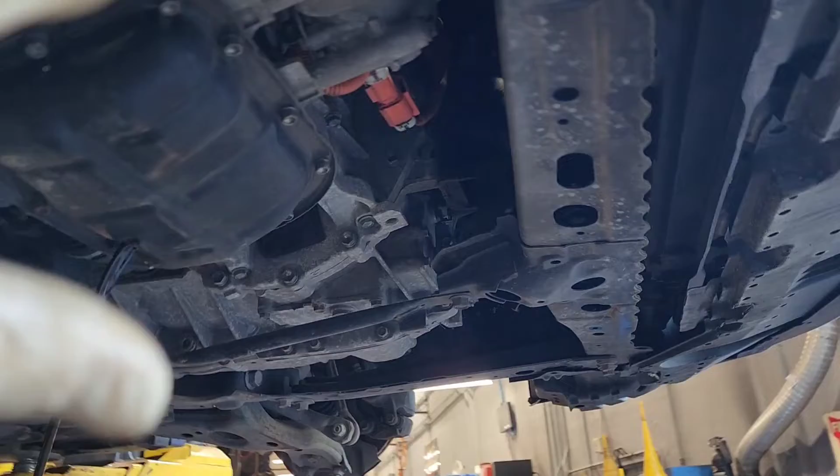Now, if you have a lift and you're doing this in a shop, the fastest way to do this is take off this undercover, take off this side cover right here. Go ahead and drain your oil because the oil sits higher than the timing cover. While you have it here, you want to go ahead and take off your oil filter right there. Pull your oil filter cap out. Then go ahead and pop off the bolts right there. You have 4 12s, and that's the housing, and just let it drain.

You're going to have your connectors back here: a crank sensor, an oil pressure switch, and an O2 sensor. Disconnect those, unclip it from the metal harness because you're going to pull the harness all the way up and over. Then drain your coolant right here.

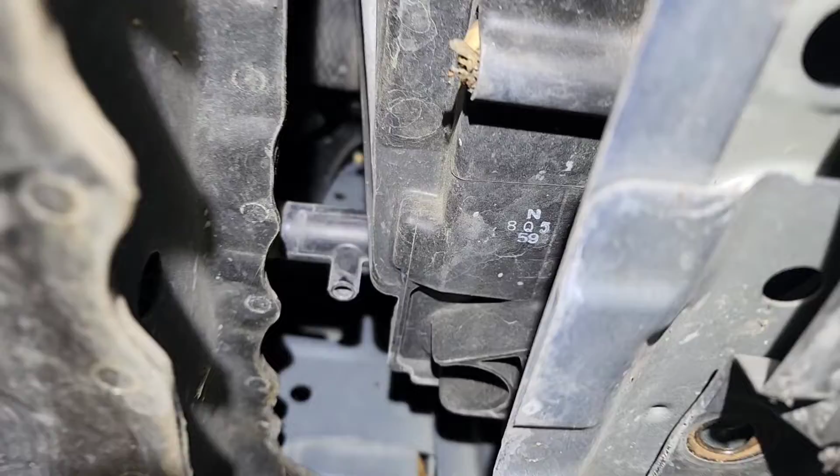So take out 3 bolts and then loosen 1, and then just tap it with a hammer. It doesn't take much and it'll pop loose. Then we can go ahead and pull this housing off like that. Super easy.

Then you have those 2 O-rings there. You want to make sure you get those so you don't lose them, to match them up. Depending on the miles on the vehicle, they're going to be pretty stuck in there. These ones came out not super bad. These O-rings are the same size as 1 or 2 of them inside the timing cover. I believe it's the one that's...

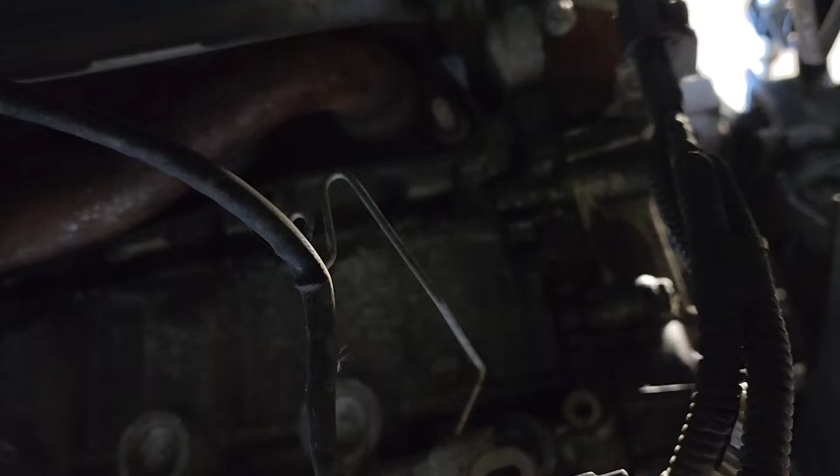It's really bad. You can see it leaks all down the back of the timing cover. That's why we're replacing the timing cover, that's why we're resealing the timing cover.

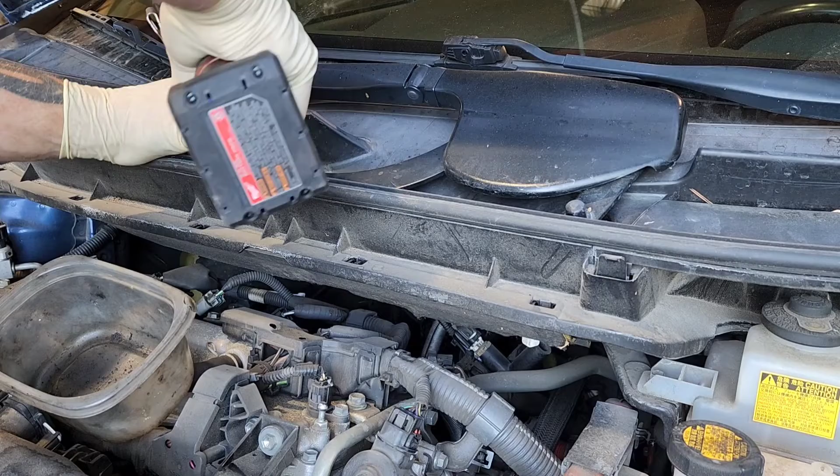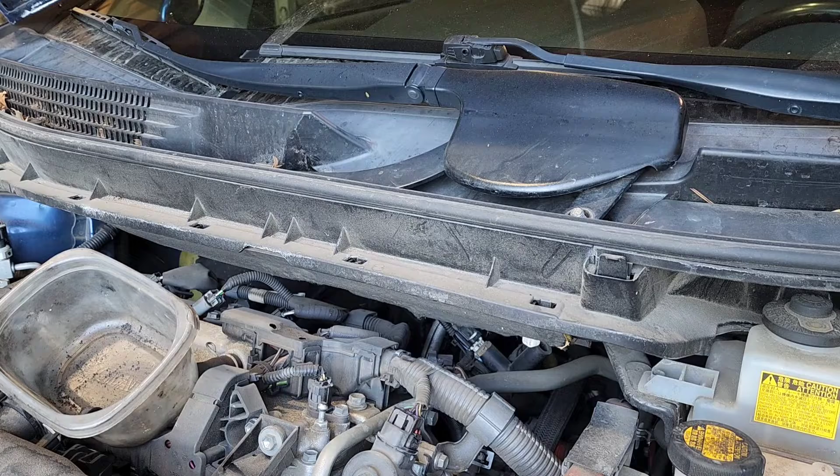So I did this way out of order. To do this the fastest, the first thing you want to do is take off your wipers, take off your cowl, get all this out of the way. Take your valve cover off to get your engine rolled over to top dead center. Then while you have it in the air, you can take the balancer off, the water pump bolts out, and all the timing cover bolts out from underneath while it's in the air, and it's easier.

So this one here, you can push it down like that. The plastic part that goes over the cowl is super easy. You just have a bunch of little clips along the front and it'll come right out.

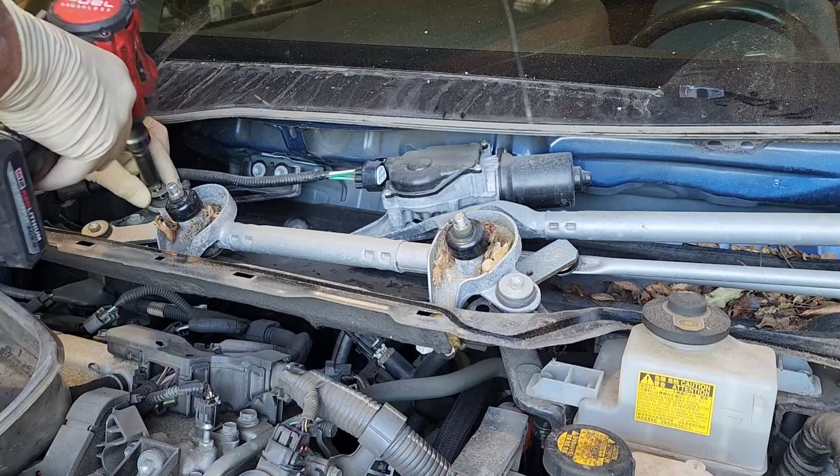You're going to disconnect the connector and unclip the harness. Then you're going to have 4 10s for the wiper motor assembly. You get those out, and then the wiper motor comes right out. Then there's going to be a bunch of 10s along the metal cowl panel. You unbolt all those and pop it loose. Get a vacuum to vacuum up all the debris, and it'll pop up and come right out.

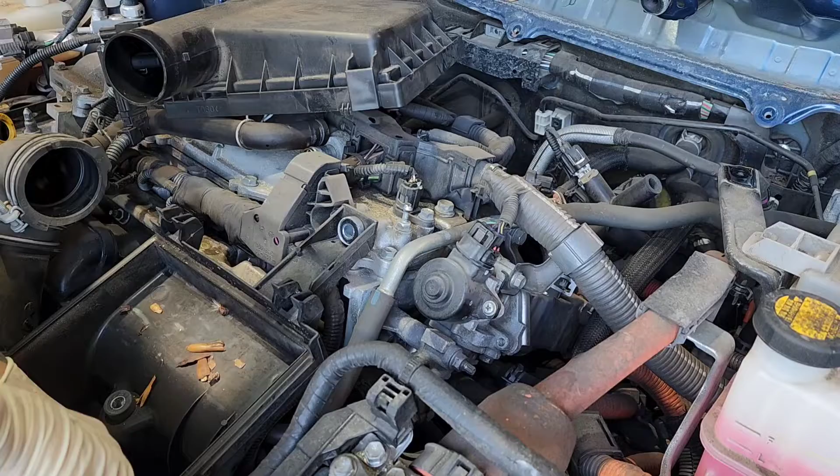So your airbox has bolts inside, they're all 10s. And then for your intake air tube on the throttle body is a clamp. Everything else is a 10 mil.

So these are the new Lisle electrical disconnect pliers. These work great for fuel injector connectors. You just do like that. Look at how easy it releases them. Super simple and not very expensive at all.

So I unbolt everything on the harness so I can pull it over like this, and I use a bungee to get it all the way out of the way.

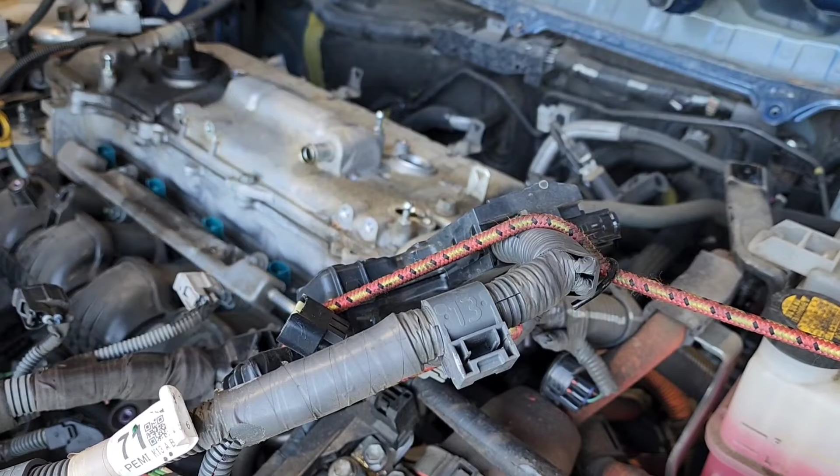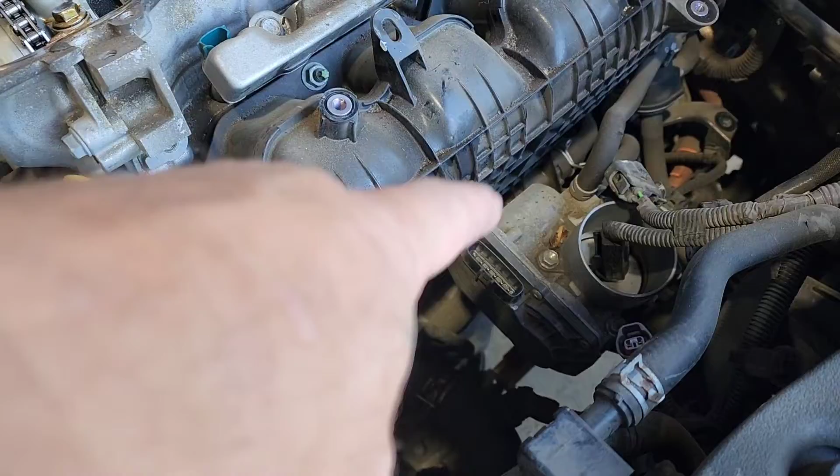The next thing we need to do is put a jack stand and a piece of wood under the oil pan, or if you don't have a lift, then you'll need to use a jack to support the engine, because we have to take the engine mount out.

The engine mount has a bolt and a nut right there, and then a nut underneath. That nut's a 14, the top 2 are 17s, and you'll have 3 17 millimeter bolts around the perimeter. If you go ahead and take your coolant bottle bolts out, you can get the engine mount out. Then we need to take this bracket off for the engine mount, but this stud right here is in the way for that bolt. So if you take that stud out, then you can take that bolt out easily.

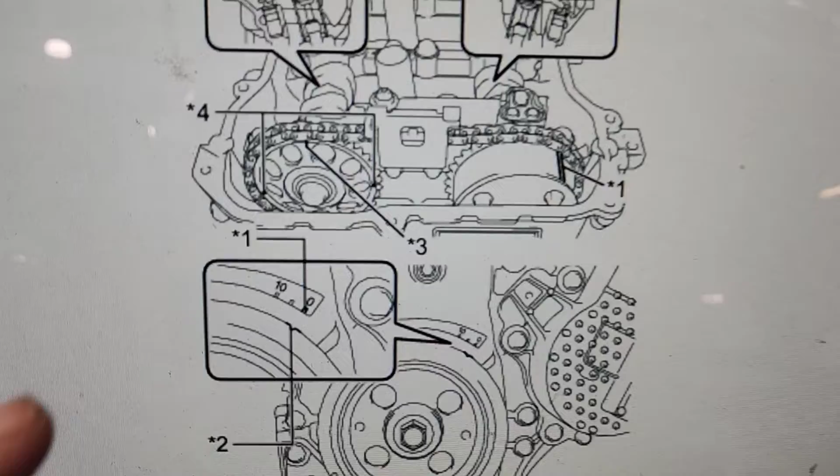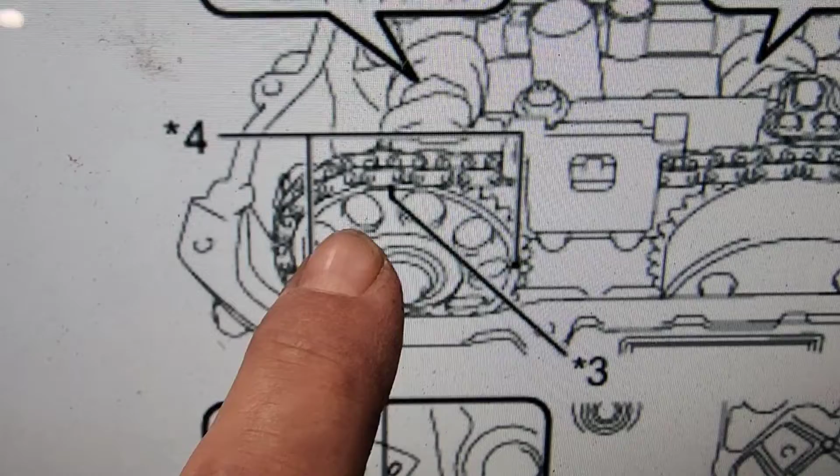Once you get the valve cover off, now this is really important. We're gonna roll over the crank until the notch right there lines up with the 0. But what we're looking for is there's a dot on the back cam and a slot on the front cam. This slot right here is gonna be around the 1 o'clock position, and this is gonna be around the 12 o'clock position.

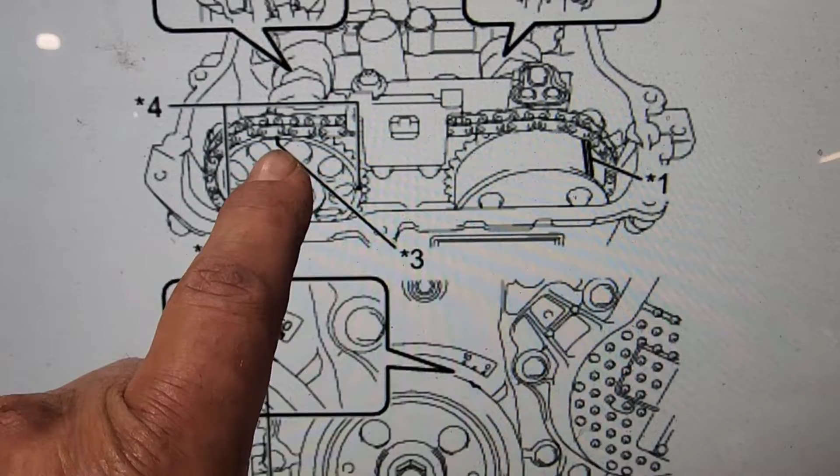So if we roll this over to 0 and we don't see those 2 marks, that means that the crank is 360 degrees off, because this crank rotates 2 times per 1 time of the camshaft. So if we're lined up here and this is not there, that means that this dot is down there and this slot right here is down there. So we're gonna roll this thing over the first time and see where we come up, because we need this thing to be in time.

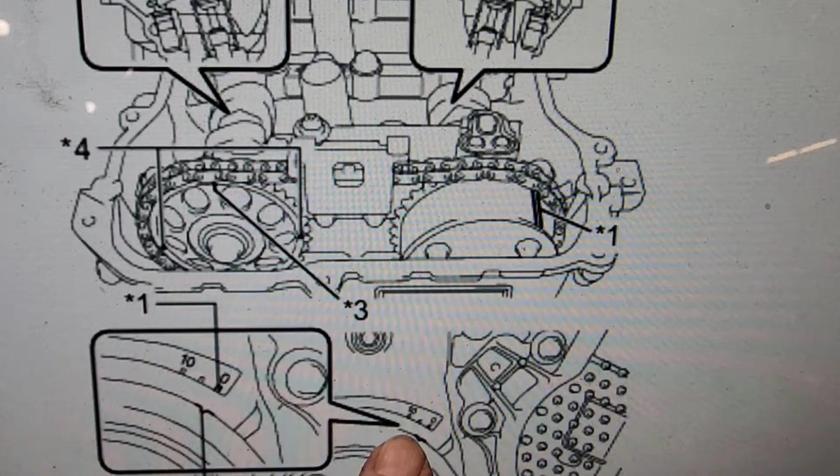As you can see right here, we have the crank lined up, and let's take a look up top - we don't have a notch right there, and we don't have a dot on the rear cam. That means that the cams are 180 off.

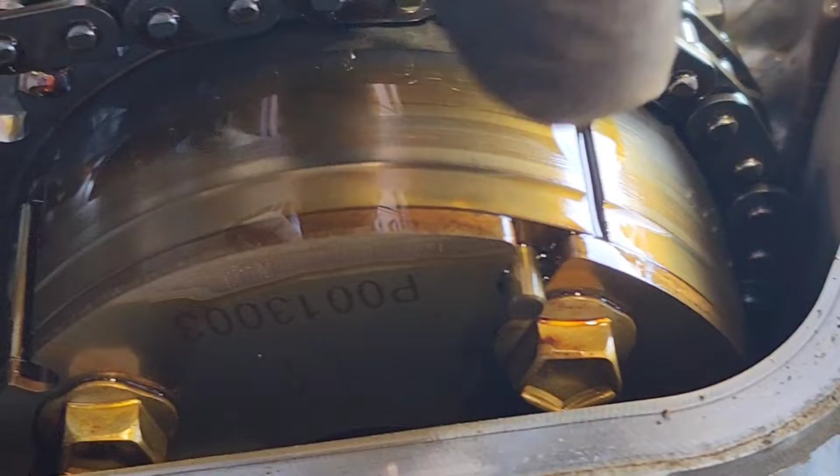So now we need to turn the crank 360. So now I turned it one more time - I was on the wrong mark before, but it was still off. So now we've rotated the crank 360 degrees, and now we have our notch on the front cam right there, and we have our dot on the rear cam, meaning the engine is timed.

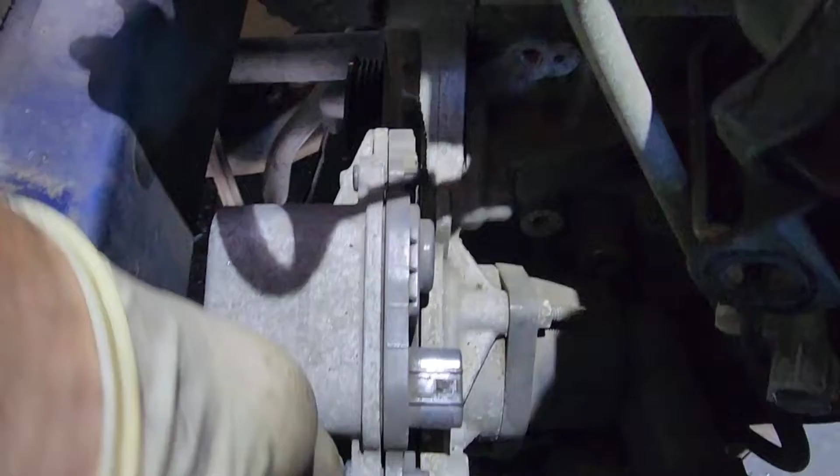Your water pump is electronic, so you have your connector disconnected. Take your 5 bolts out and pop your water pump off.

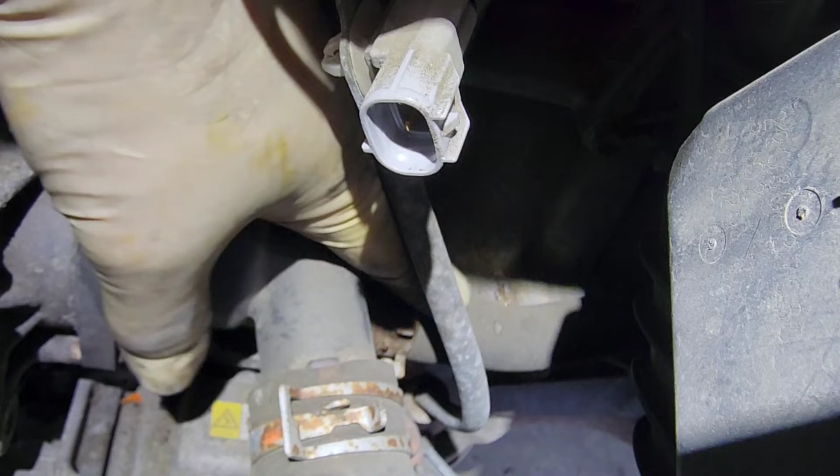Your thermostat housing is going to have to unbolt because it bolts to the back of the timing cover. Now the problem with the thermostat housing is you have this bypass coolant hose back here, and the engine oil dipstick tube is in the way. Well, I'm not replacing this thermostat housing, I just need to remove it from the timing cover. So what I'm going to do is disconnect the engine oil dipstick, and then I will be able to unbolt the thermostat housing and pull it back.

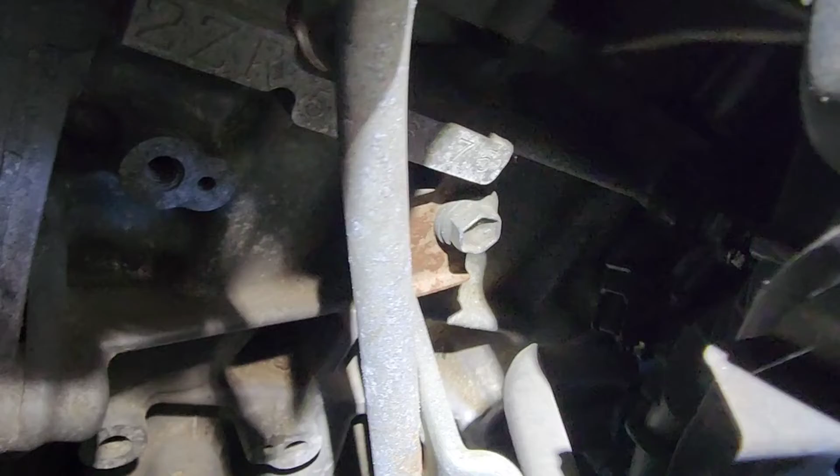The dipstick, there's a clip there, and there's a bolt right there that bolts the dipstick up. There's also a connector right here that connects in, so you have to unclip that connector.

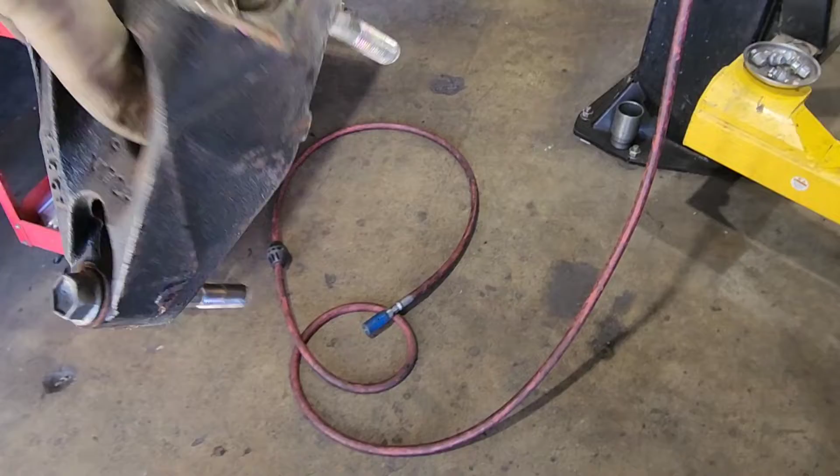That stud is just an 8 mil. Zap that out, then you can get to that bolt, and you got the three 14s, and you get that engine bracket out. That's what it looks like right there. It's got silicone on the threads because it goes through the timing cover.

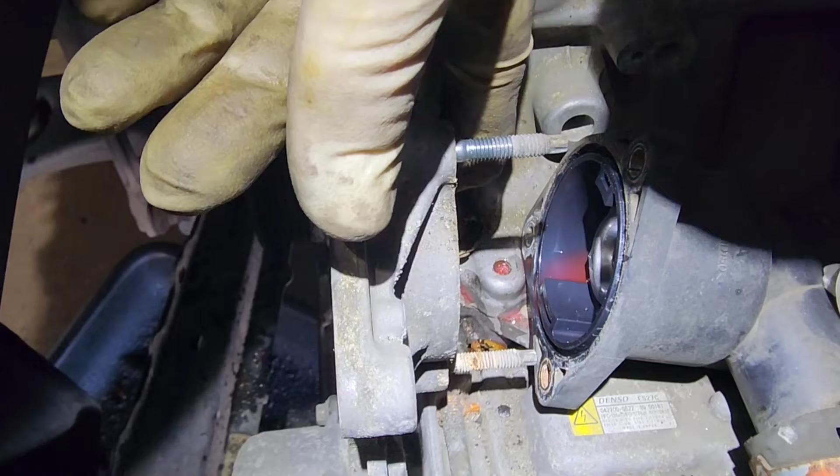So the top fastener and the front fastener are a 10 millimeter nut, and on the back side is a 10 mil bolt. So with the dipstick out, you can get an extension and a wobble socket, and you can get down in there from behind, right along the block.

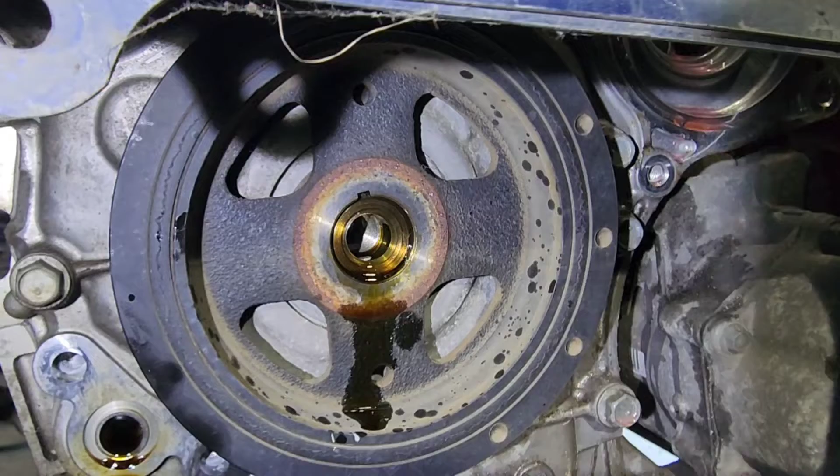Before you take the tensioner out, you want to get this balancer off. It's a 19 mil, and if you put a pry bar on the top corner and pull on the bottom corner, it will come out.

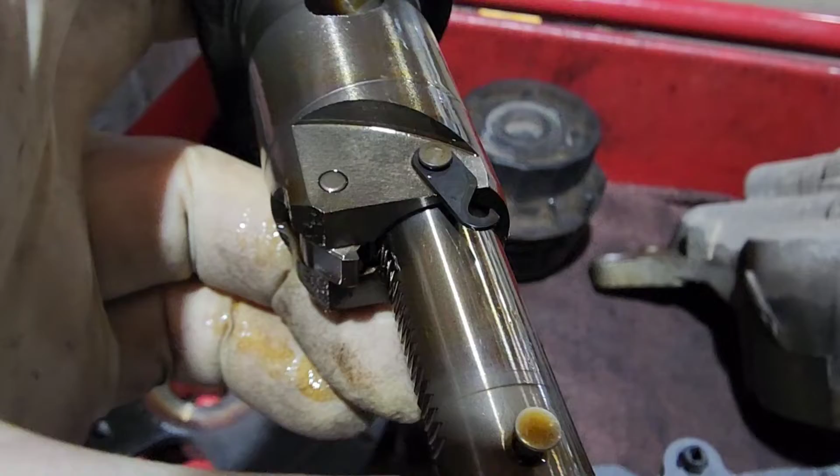So here's what your tensioner looks like. It's got a metal gasket and a little lever right there. That lever faces up because it's to lock the tensioner in place for install. So we're going to reset this tensioner, and we're going to use that little clip there to hold it in the reset position. I'll show you that later.

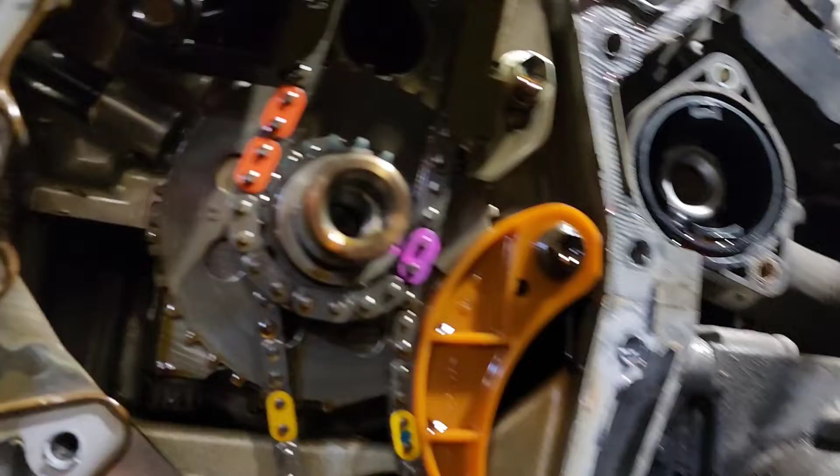So I mark the chain to the sprockets. Right there, I mark it to the dot, and that front one, I mark both the links on both sides of the notch. Because this slipper that's on the rear, where the tensioner normally resides, it can slip off the inside of the block and fall down. So if that slipper falls backwards, then your non-tension side of your chain can slip off the crank, and it can possibly move on the front, which would make your engine out of time. So I mark that link right there next to the dot on the crank, and I know that's where the engine was when I started. Before I put it back together, I make sure all 3 sprockets align.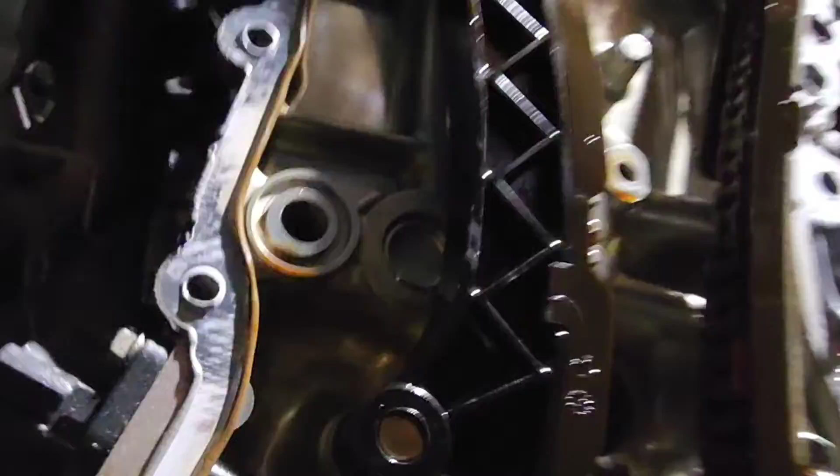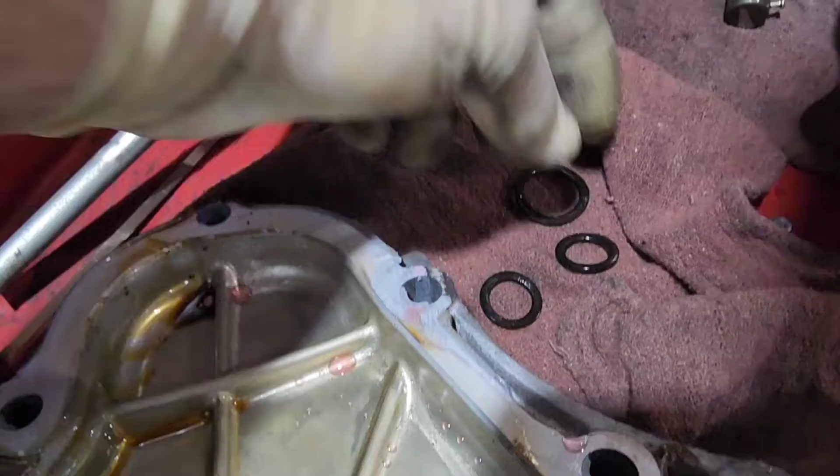Now there's an O-ring right there. That O-ring is the same as the 2 on the front of the timing cover for the oil filter housing. And then you have two smaller O-rings up here, right there. Those are all in your timing kit as long as you get a MAHLE kit. So that's the bigger one, that's the bottom one, and these are the top two, they're smaller. This big one goes there, the two small ones go there.

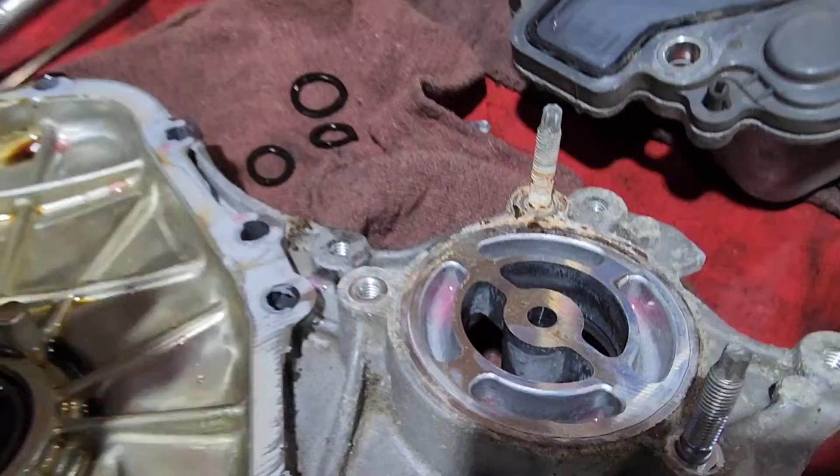So we're going to go ahead and knock the crank seal out, clean up the thermostat seal where the thermostat's going to ride. And we're going to flip it over. You're going to clean up where those two O-rings go. You're going to clean up the front of the water pump surface where the water pump seals.

Anytime I remove a timing chain tensioner, I replace it. Usually I will sell it with the job. On this one, I didn't estimate it out because this one came in for something completely different and I really didn't think they were going to fix it. Most people don't fix the timing cover on Priuses.

Next up, we need to clean the block. We need to get all this silicone off of the block surface, the head surface, everywhere that the timing chain rides. We need to get that all cleaned up. And right there, you have one bolt hole right there. You're going to get that silicone off there as well. Now that's where that 10 mil rides. That 10 mil has a washer that's just like the one in the middle of the valve cover. It comes in your MAHLE set, as long as you get a MAHLE set, and it is right there.

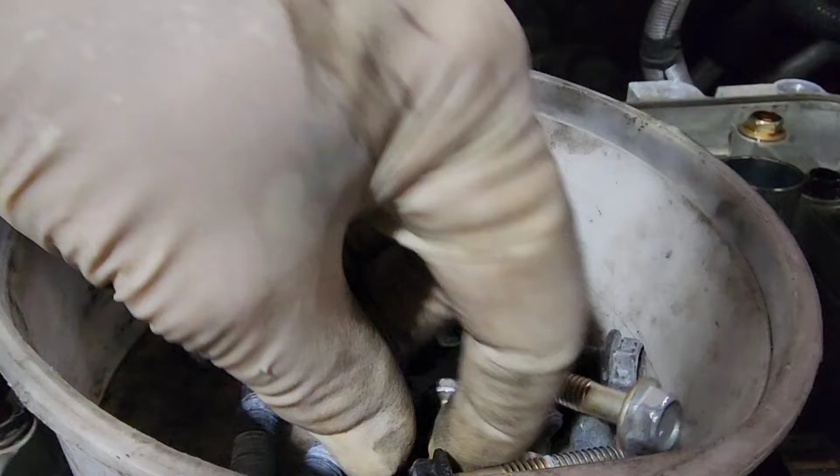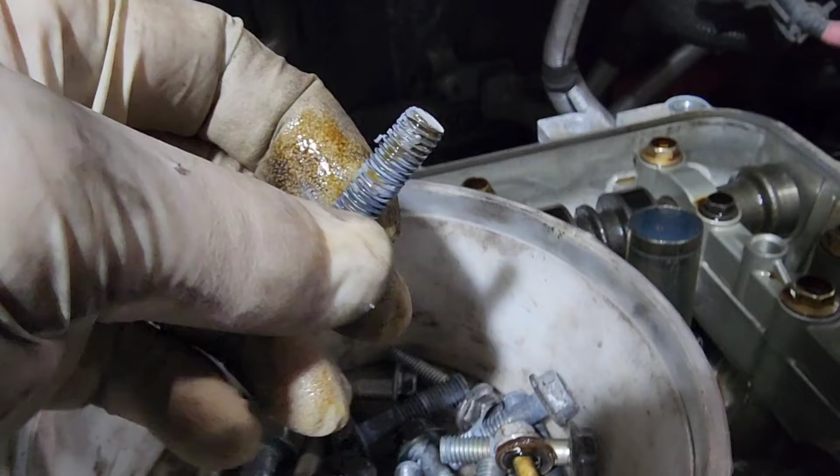Don't forget it. And you want to get all this old silicone off of all your timing cover bolts. You don't want that to go through and compromise your silicone seal. So I always take it over to a wire wheel and run it around there and get all the silicone off all the threads and clean up the bolt heads as well.

All right, you want to get your timing cover all clean, knock your old crank seal out, get all this clean, put your new crank seal in. Before you take your old one out, you want to kind of look at the depth of your crank seal so you get an idea of about where it needs to be.

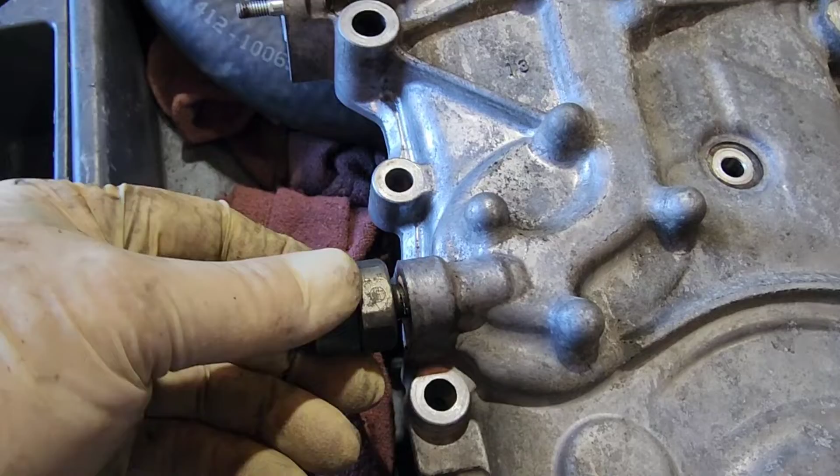Clean up your water pump surface. I always take out, if you use a parts washer or anything with heat, I always take out the oil pressure switch. I don't like putting sensors in parts washers. Clean up your tensioner surface. You want to clean up your thermostat surface here and get all this cleaned up nice and clean and dry, and also the top.

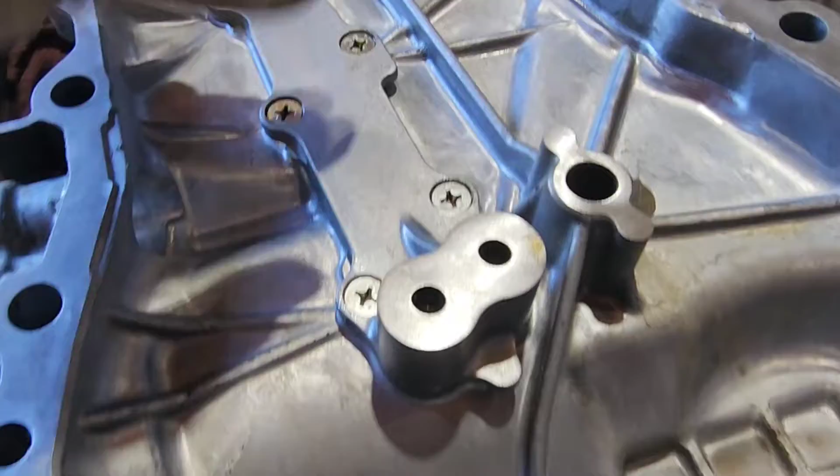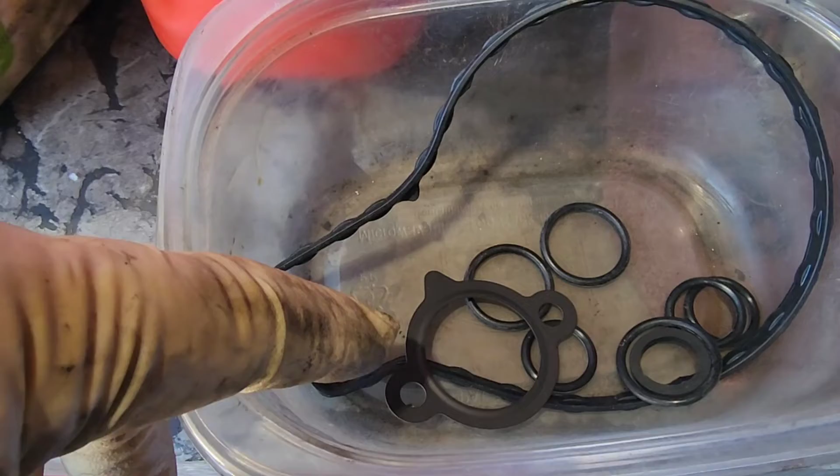So here's what I'm using for parts. I got the MAHLE valve cover set. This comes with everything you need for the valve covers. And then what you want to do is this MAHLE timing cover set right here, it comes with almost everything that you need. The only thing it's not going to come with is a thermostat seal, this variable valve timing gasket, and then there's a little tiny gasket that goes in the top of the valve cover.

You got the one that rides there and one that rides there. So you won't have either one of these and you won't have a thermostat seal. And your MAHLE kit comes with silicone and everything.

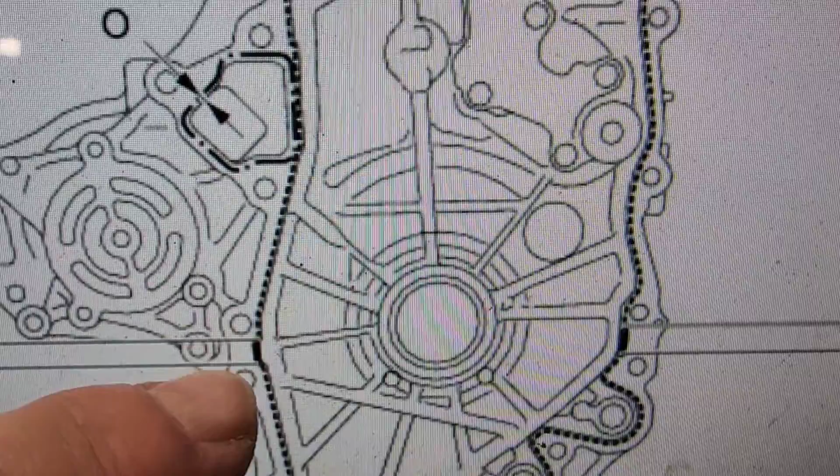Here's what the timing cover should look like with your silicone. You're gonna have thicker silicone right there because that's where the head and the block meet. You're gonna have a thicker amount of silicone there, and also right there. You're gonna go around just like that, and also where this one bolt right here goes. Don't put silicone right there, and don't put silicone there. We have oil seals for that.

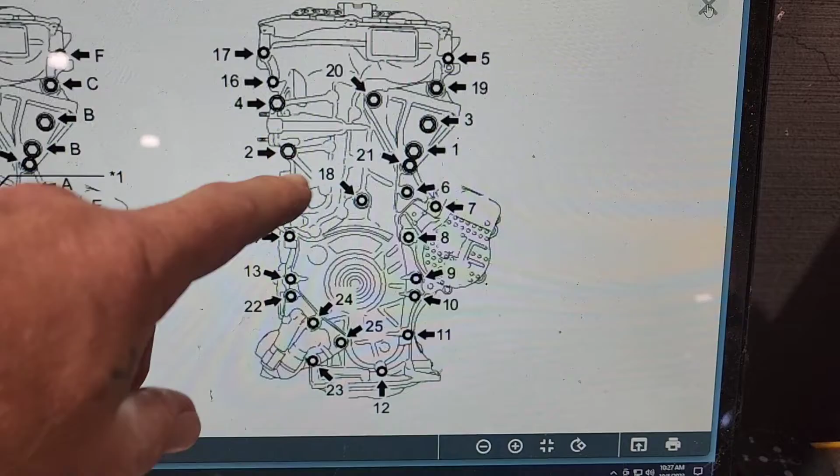If you really want to torque it in the order of procedure, go ahead and pause it here and draw yourself a picture with all the numbers in order. Now here is all the torque specs. I'm going to show you what each letter indicates as far as the torque, but that's what it is. So you can pause it right there and get your torque spec and your torque procedure.

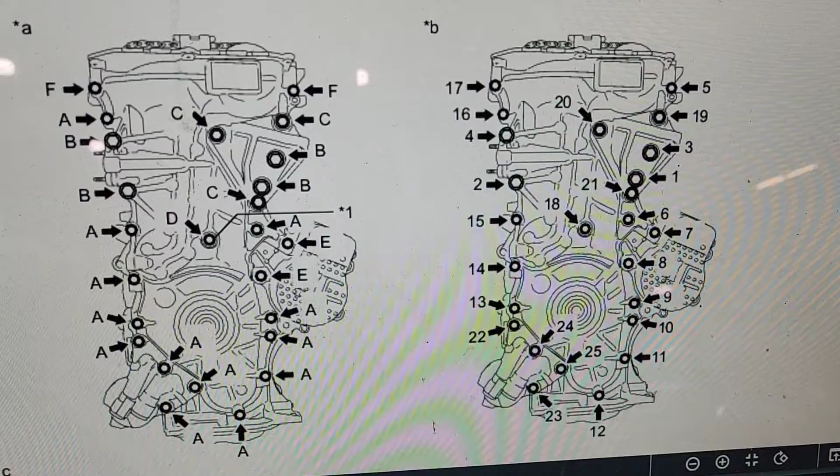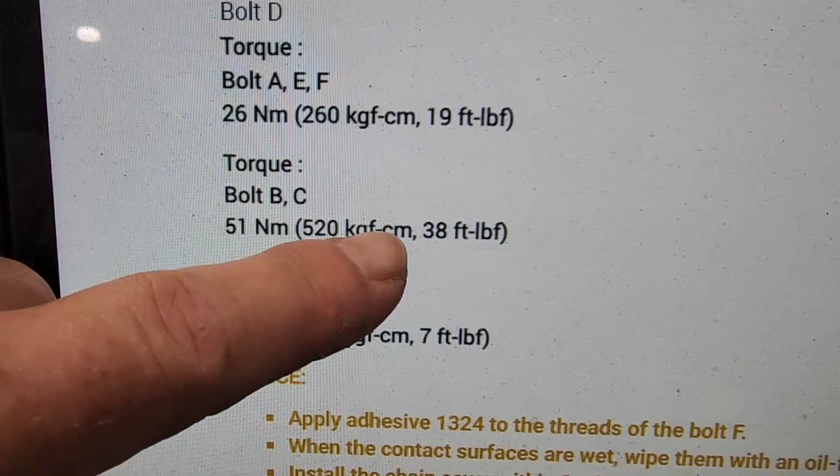If you look at the torque spec right here, A, E, and F are 19 foot-pounds. That's going to be your 12 mil bolts. B and C, that's your 38 foot-pound bolts, your 14 mil. And bolt D is 7 foot-pounds, that's your little 10 mil bolt. That 7 foot-pounds calculates out to 84 inch-pounds. Just so I don't forget to put it in the video, the valve cover right there is 7 foot-pounds, which is 84 inch-pounds.

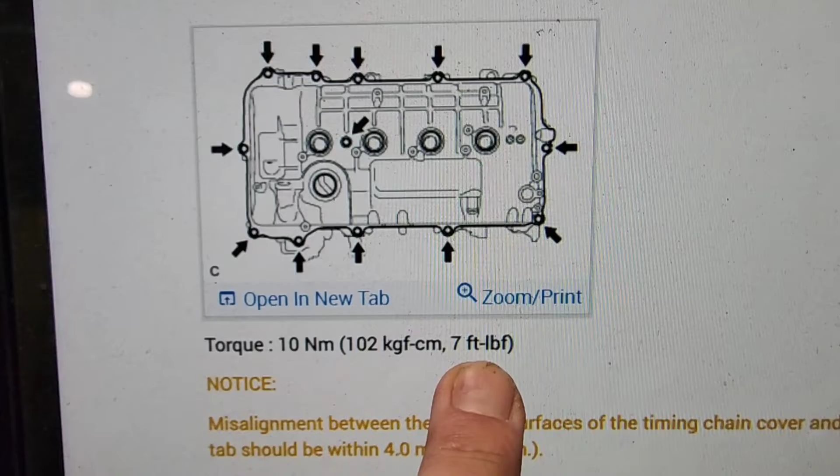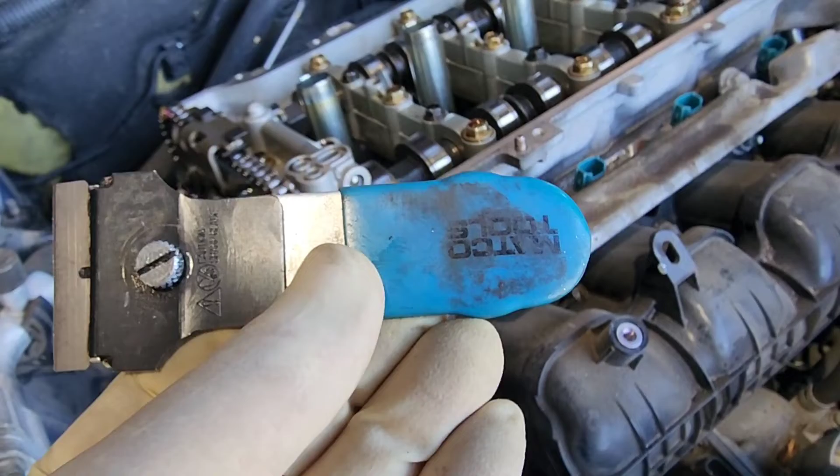Now it's time to clean the head and the block surface. What I do to get all the old silicone off is I have a little scraper from Matco Tools, just a few bucks, I think it's under $5. Turn that screw, take out your old razor blade, put a new one in. Gives you a nice little flat surface.

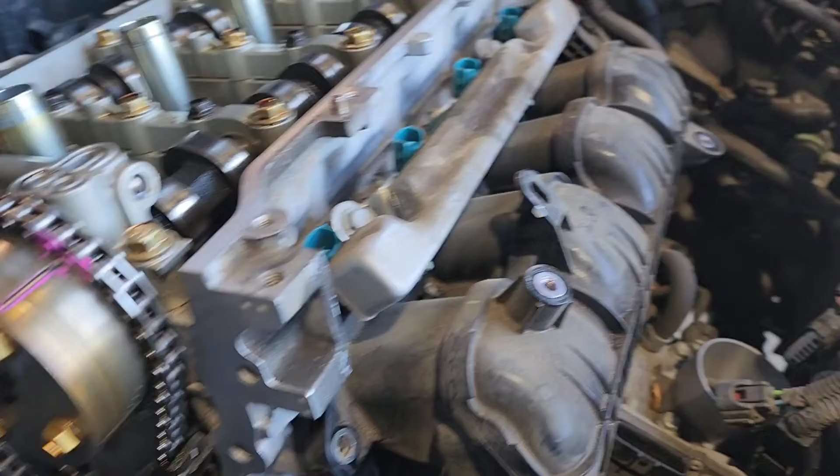I use a wire brush to get the rest of the silicone off, and then I take little sheets of Scotch-Brite pad and cut them into squares. I take that little square of Scotch-Brite pad and spray it with brake clean, then I scrub, then spray it with brake clean again and scrub. As long as you keep the Scotch-Brite pad covered in brake clean, it will continue to scrub really good. If you let it dry out, then it will start to not clean.

So you want to make sure that you get all the silicone off of all the areas. I actually will go with a mirror and just double check to make sure everything is clean. Then we need to put O-rings in those 3 spots right there. What I do is I have some Sil-Glyde, I put the O-rings in, and then I put some Sil-Glyde over them to help hold the O-rings in place. It will look like that, and like that. Now you just want to make sure you don't get silicone on those spots, only Sil-Glyde.

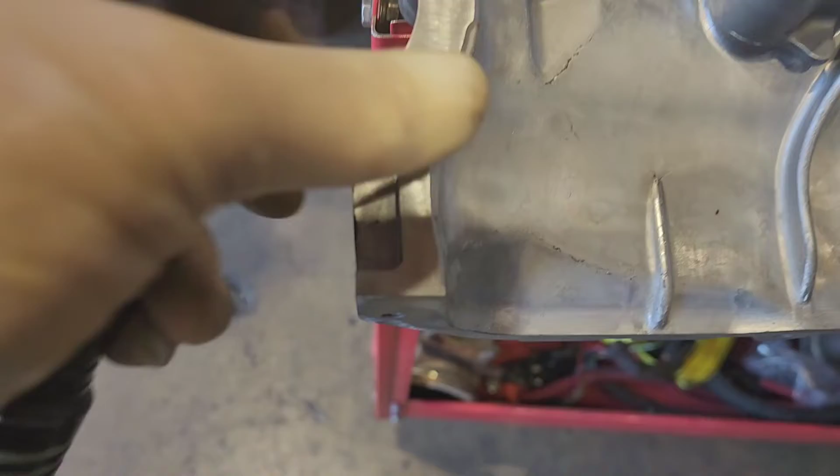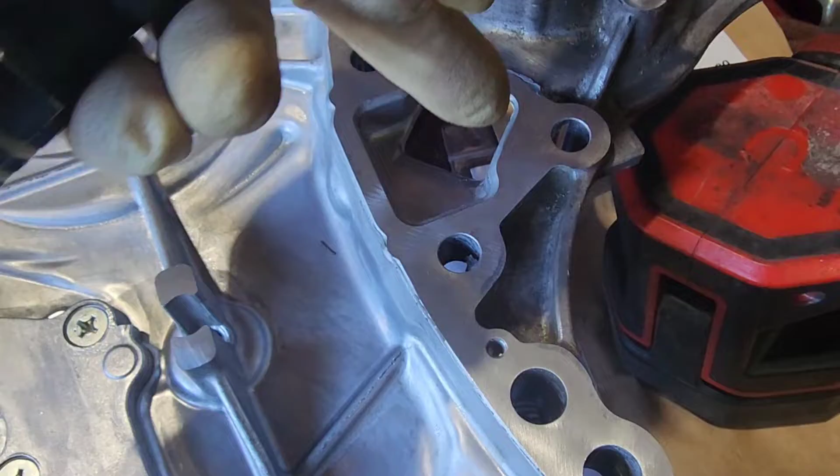Once you get your timing cover all clean, you want to spray it all off with brake clean all around the whole area here. Then I usually will take a rag with brake clean and wipe it around one more time. Once you do that, you want to go back with a rag and give it a nice little dry. Now don't forget to go around that coolant passage right there that feeds the thermostat and the water pump.

You also want to make sure that you clean off your spot for your O-rings, and also don't forget to put silicone right there. And then clean off for that O-ring as well.

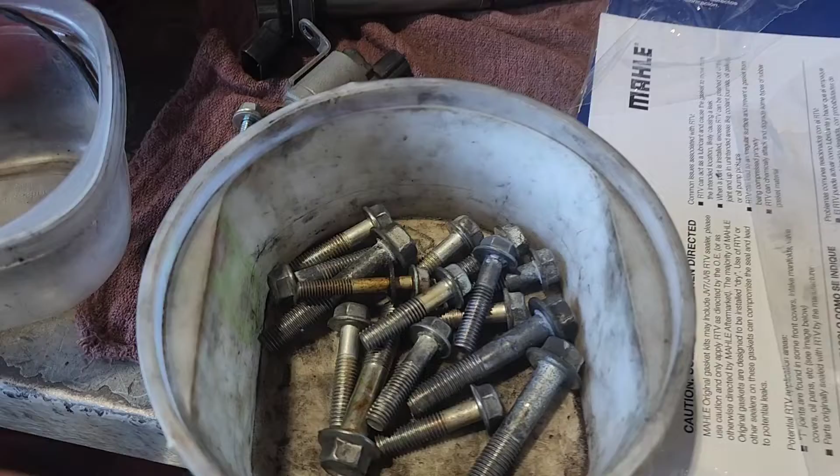Now the last thing that I do before I put silicone on this is I take all the bolts over to the wire wheel, and I wire wheel all the old silicone off of the threads, and I clean up the heads of the bolts so that way they're clean, because some of them are going to be covered in oil, and I don't want it to look like that. I want you to know that I was in there and I did that job and everything is clean.

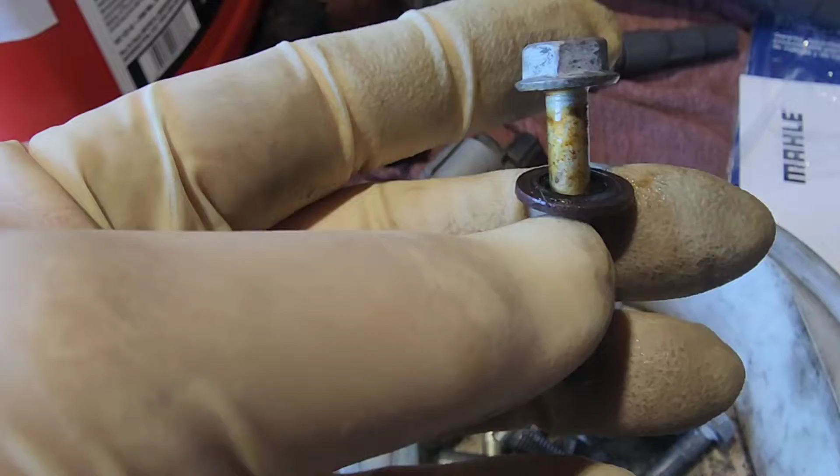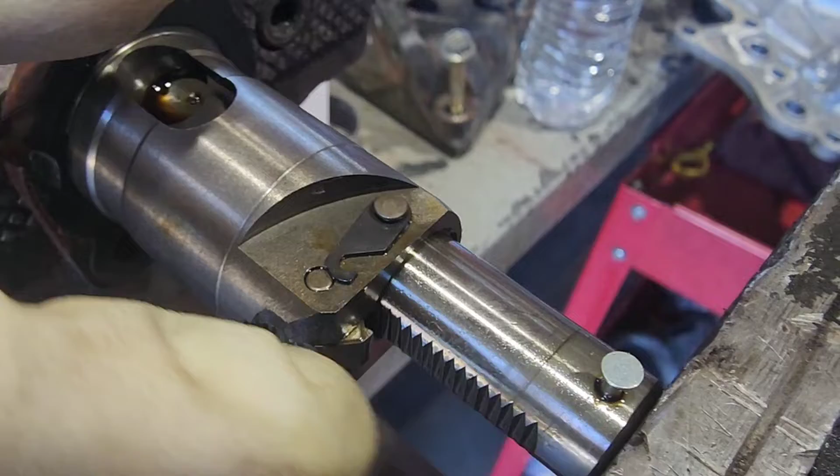Now if you're not going to replace your tensioner, then you need to reset it. To reset it, you have to have this lever turned this way because it's going to lock onto that pin. You have to push down on that mechanism right there.

You can push down with your finger like that, or you can stick a screwdriver between the teeth on the plunger and the mechanism. What you have to do is pry out on that while you turn a vise, pushing the plunger inside the tensioner. Once you get it all the way inside, then you can flip that lever and lock it onto the pin.

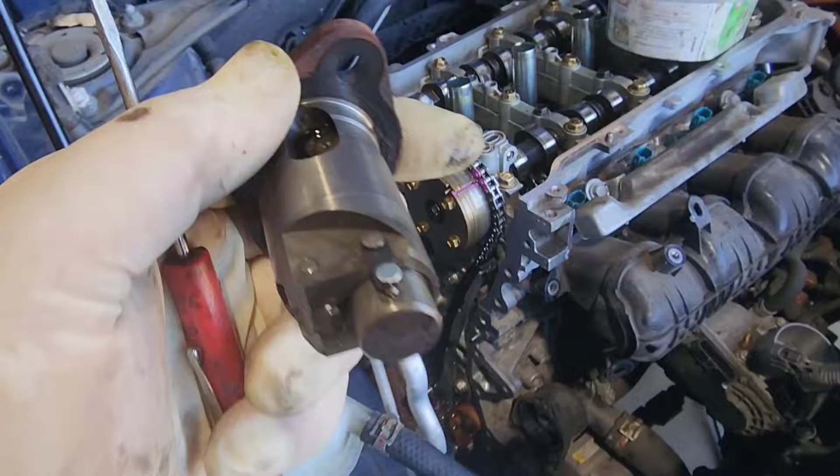Now, if you don't have this lever fully open on the mechanism, it'll bite on those teeth as you start to go inside. So that's what it looks like right there. Once we're all done and we put this in the vehicle, we have to pop that pin off, otherwise that tensioner will stay locked in place. I'll show you how to do that.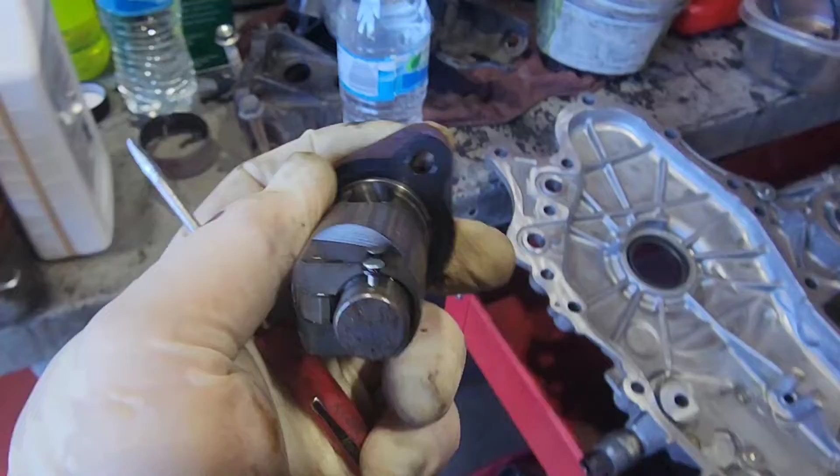You want to make sure you get your old metal gasket off of your tensioner. If you get the Molly kit, it comes with a new tensioner gasket. You don't want to reuse the gasket because one of the more common problems with this engine is the timing chain tensioner leaks. The gasket leaks and it makes quite a mess. So you definitely don't want to reuse the gasket.

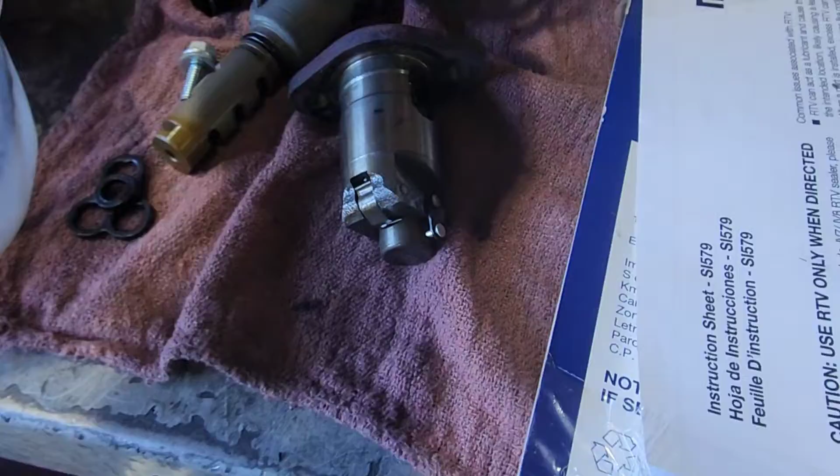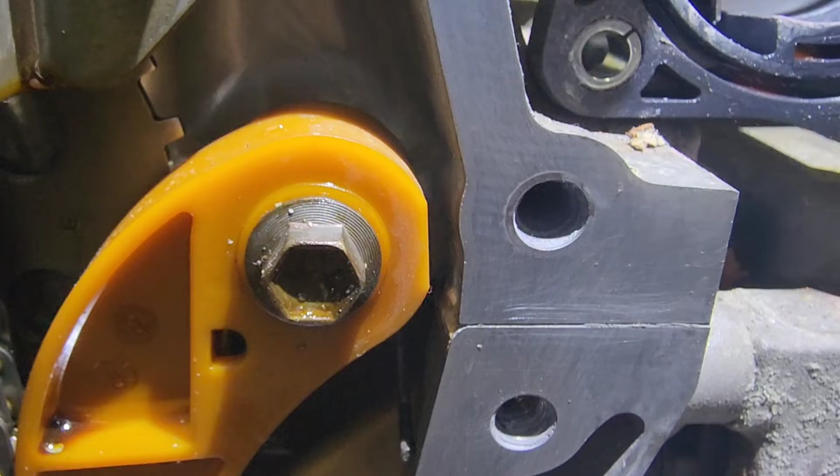Even though in the picture of the timing cover they show you to put extra silicone in certain places, I still put the silicone around the timing cover, and then at all the seams - there's 2 seams on each side where the upper oil pan and the lower block meet, and also where the head and the block meet - I put a little dab of silicone on each one of those seams.

So remember, we marked the chain and all the sprockets, so now it's time to go and make sure that everything is still timed up good. The crank is still timed. And now we're going to double check the cams to make sure they haven't moved. All right, that one looks good, and that one looks good.

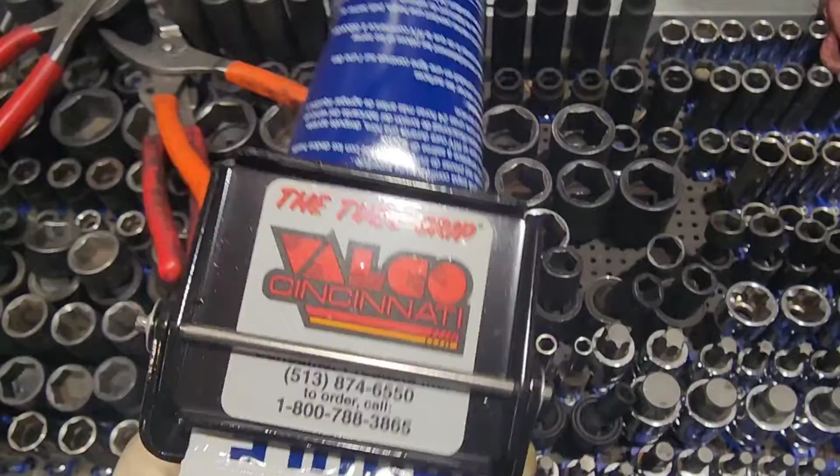So here's a great tool to get, it's from Valco Cincinnati. If you get silicone that's in a tube like this Molly silicone is in a tube, it gets quite tiring to be pushing on this tube while you're going around a whole timing cover. So you slide the tube in - basically it's like a little handle, and it has a spring, and then you squeeze the handle, and it applies pressure on the tube of silicone.

Now here we are running the silicone all around the timing cover. This is what it looks like. Don't forget that spot right there. And now you can see right here where I put it along the seams of the engine. And I forgot one - there's 3 seams on each side. Don't forget that.

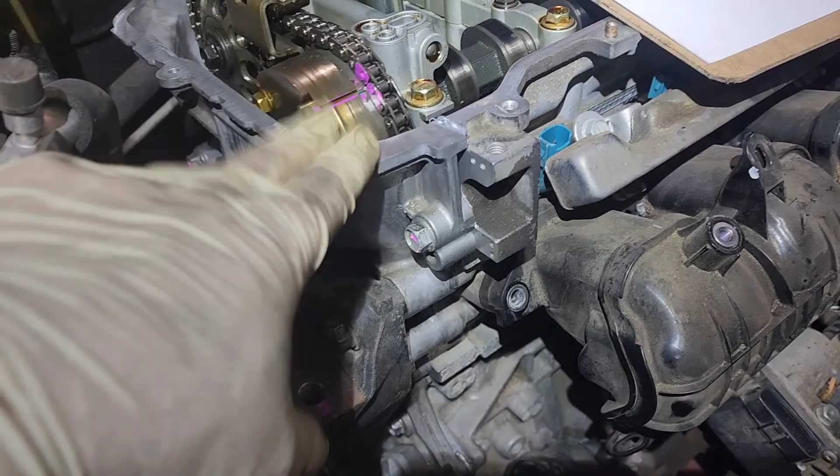So once you get your timing cover in place, go ahead and put all your bolts in. And remember, your 12 mils are going to be 19 foot-pounds, your 14 mils are going to be 38 foot-pounds, and your 10 mils is going to be 84 inch-pounds. So you want to put a couple in the top and a couple in the bottom to make sure your timing cover is on properly, and then go ahead and put it in.

Now, once I torque the bolts, I like to put a dot on there, so I go around with a mirror to make sure that I didn't miss any bolts, because it's easy to miss one.

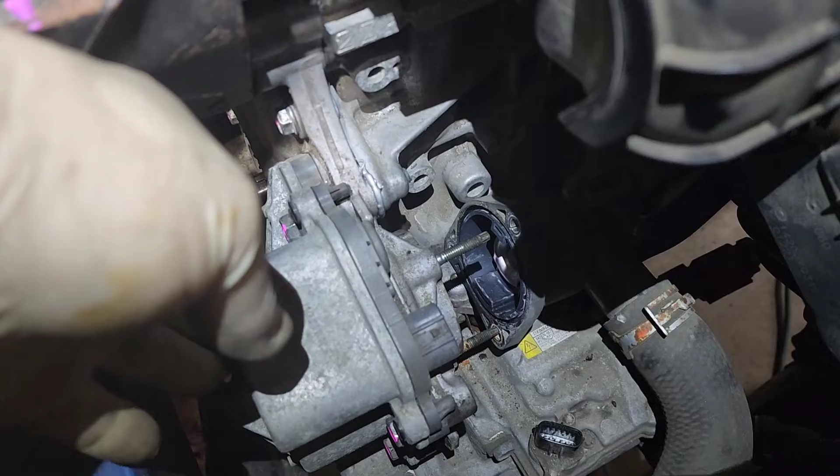Once you've got your timing cover all torqued and you double checked all the bolts, you're going to put your water pump in. Put a new gasket in your water pump, put that in because a couple of the bolts bolt through the timing cover. So you're going to put those 5 bolts in and torque them at 19 foot-pounds. Then you're going to put your engine bracket on and torque those to 38 foot-pounds.

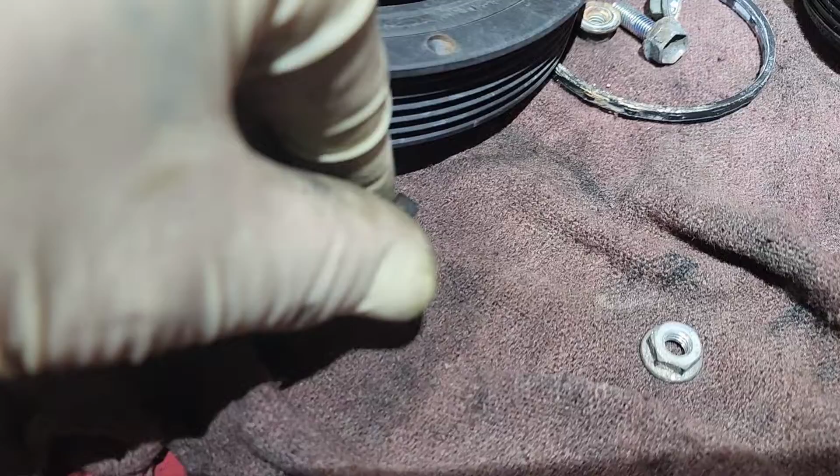Next is the timing chain tensioner. When you put the timing chain tensioner in, you want to take your tensioner and you're going to have 2 nuts, and that's a little clip that goes on the bottom nut for your wiring harness bracket - it's a bracket for your wiring harness. You're going to take your timing chain tensioner and clean it up. You're going to put a new gasket, and you're going to have to apply inward pressure because it's going to be pushing on the slipper while you run the nuts in.

It's going to be trying to push out on you. So the torque spec for the timing chain tensioner is 9 foot-pounds. I think it's 108 inch-pounds or 106 inch-pounds. I can't remember, I'm not going to go over there and look.

But anyways, what you guys need to do a job like this is a good headlamp. This is a Streamlight headlamp. It tilts this way, and the back of this thing turns to the side, so if you're on your creeper, the battery pack's not up against the back of your head.

Moving on, now I can't show you this part, but I'll explain it. Right down there, it's really hard to see, is the timing chain tensioner. You have to stick a screwdriver down there. This is very important: do not put this valve cover on. I've done it before - I got pulled away when I was doing a timing cover, and when I came back I smashed the valve cover, and then I realized I didn't pull the chain thing. You have to release that chain tensioner or you're going to destroy the engine. So make sure you release that lever all the way, and you'll hear it clunk out.

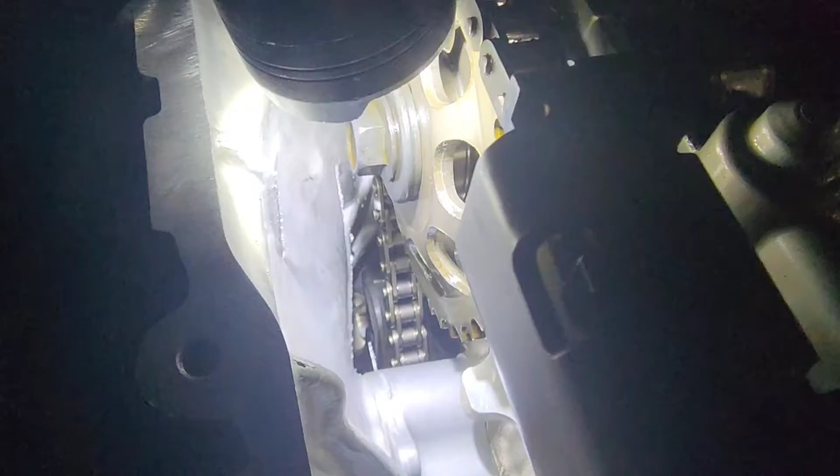Now, when you're putting your timing chain tensioner in, you're going to have to apply pressure because it's pushing up against that non-tension side of the timing chain, so I'm going to flip this lever. The valve cover is 84 inch-pounds as well. You can actually take this chain guide here, the slipper, and push it towards the back, and it'll push in on the tensioner, and that will pop the lever out. Once you get the lever popped out, you need to just move it out of the way more so it doesn't get stuck on anything.

So the last thing is, once you've released your tensioner and all that's good, you want to take a razor blade and cut your old silicone off flush with the top right there. Then you're going to wipe it down with brake clean, apply a little bead of silicone on each one of those seams, and put your valve cover on. Do not forget your oil control solenoid gasket there and the O-ring.

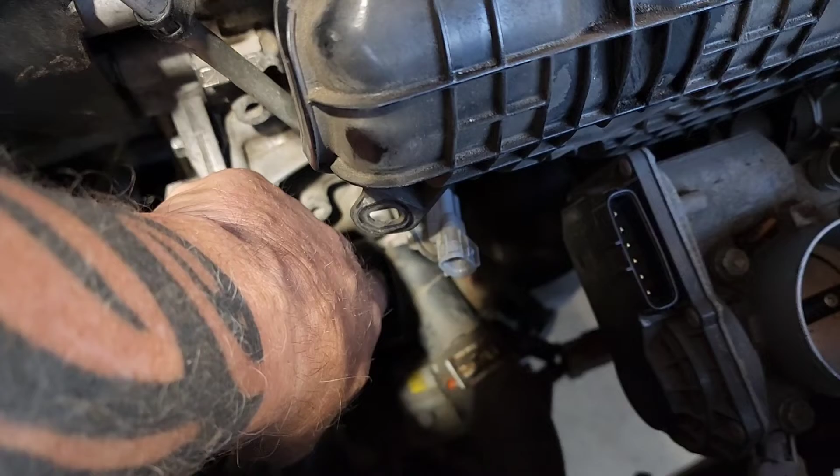So if you went the route of pulling the dipstick to not have to take these tubes off the thermostat housing hoses, don't forget to put your dipstick tube back in. Now, one thing to add is that if you are replacing your thermostat, you don't really need to take this dipstick out - you have to take the hoses off anyways. In this case, I didn't replace the thermostat, so we needed to move the dipstick. And I'll tell you what, with this dipstick out, this is the easiest it's ever been maneuvering this, and also getting to the bolt that's back under here - you have to kind of come in behind this dipstick, and there's not a lot of room. So don't forget to put that back on.

Under your valve cover, don't forget your oil control solenoid gasket here and your O-ring there. Do not forget that - that's really important.

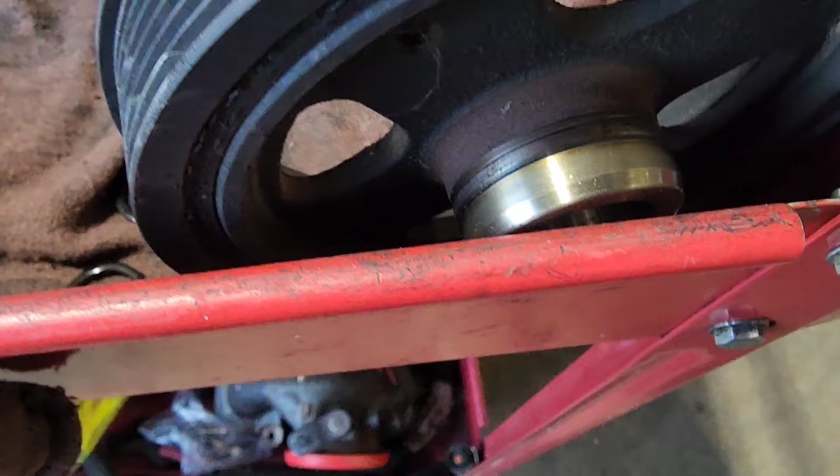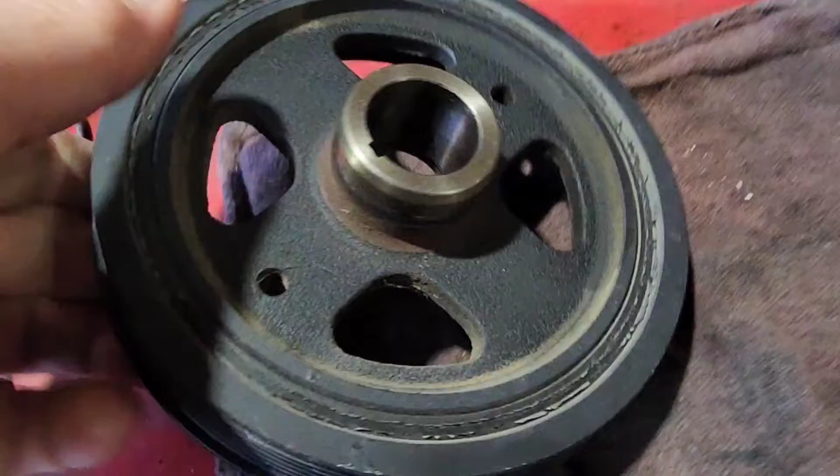Now, this doesn't really happen on Priuses, I haven't really seen it too much, but you always want to inspect your balancer like this, and take your fingernail and rub it along that edge. That little line right there is where your crank seal rides, so you want to just make sure you don't catch an edge. If you catch an edge, that means your crank seal will be too far in and it will leak, and you'll need to replace your balancer, or you can get a balancer saver kit. We just replaced the balancer. But on this one here, you just want to put some Seal Glide around here before you put it in so it doesn't tear the seal.

After watching this video, you should feel pretty confident doing this job. It is not incredibly difficult, and you don't really need any special tools - there's no special engine timing tools or anything like that.